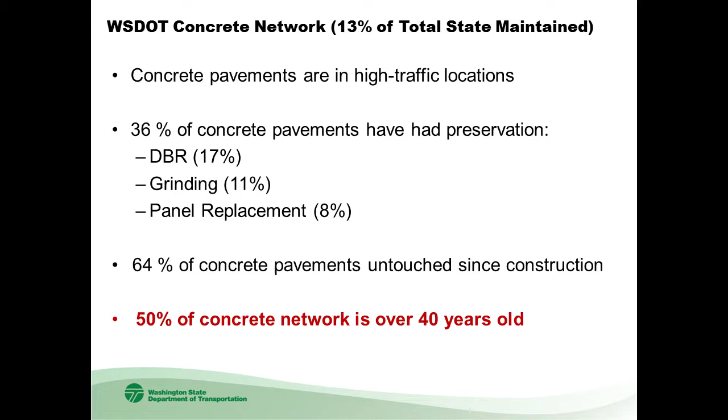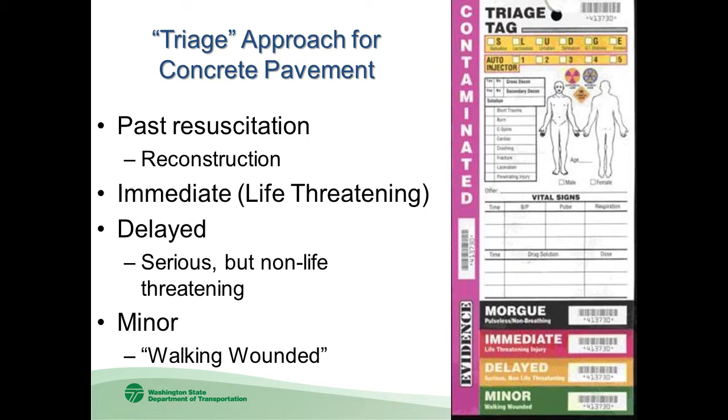Immediate means it's life-threatening. Delayed means serious but non-life-threatening, and minor is walking wounded. So we kind of use this approach to our concrete pavements as we look out into the future. We tend to try to bundle these needs into multi-million-dollar triage projects. So these are big capital projects, but we try to bundle up a lot of our needs.

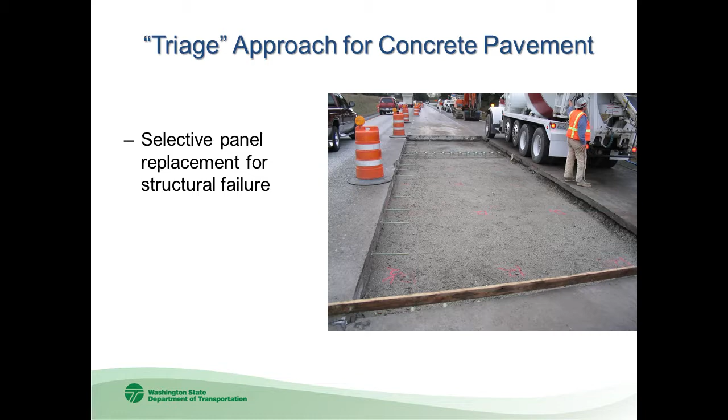And Larry did a really good job yesterday going over different types of techniques and procedures with pavement preservation for concrete. So I won't need to go into these in detail. He did a good job of covering those. So one is selective panel replacement for structural failure. So with all the traffic control, you can see in this picture, and all the mobilization, we don't want to be out there for one or two panels. We want to bundle those up into a number of panels for a given project.

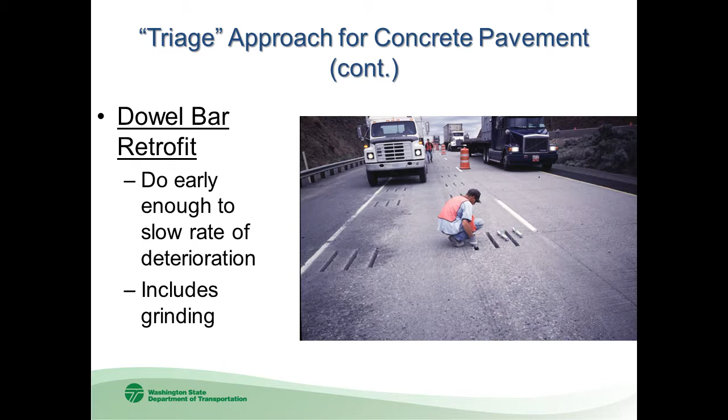We've done quite a bit of dowel bar retrofit in Washington. Those projects do include grinding. So when I mentioned grinding as a separate type of treatment, I'm talking about just grinding alone. All of our DBR projects include grinding. But we found that we get better results if this is done earlier, and by earlier, I mean probably less than 20 years of age, that if we try to DBR late in the pavement life, we get shorter periods of life extension. And we've gone through, we think, most of the DBR needs that we have, but we have a lot of grinding needs that we still need to do, and that's another big category that we have.

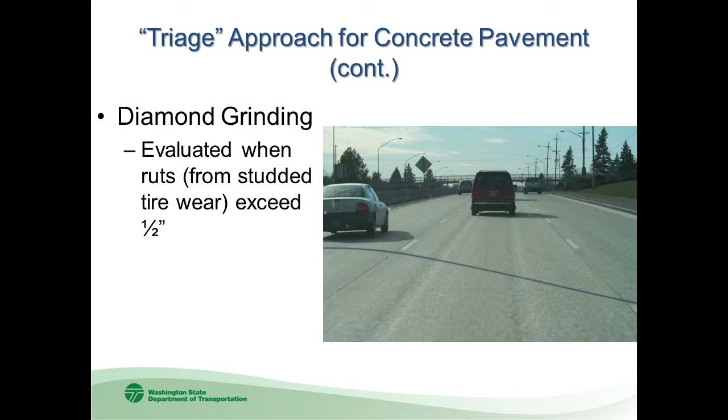We start evaluating grinding when ruts reach half an inch, but unfortunately they get deeper than half an inch. We used to have a section in Spokane, and maybe some of you have driven on it, which was like self-driving. You take your hands off the wheel and the ruts would drive your vehicle automatically up the road. But that was not a feature. It was something that we had to take care of. But now that section of I-90 going up the hill towards the airport out of Spokane is in much better shape. But we have big grinding needs due to our studded tires.

This is a Ure-Fast polymer concrete, and this is their website, liquidconcrete.com. I don't mean to specifically mention one particular product. I'm sure there are other products on the market, so this is not an endorsement. I'm sure there are other products that can do similar type of objectives, but this is a product that's worked well for us, and so I wanted to show a little bit more in detail about what we've done with

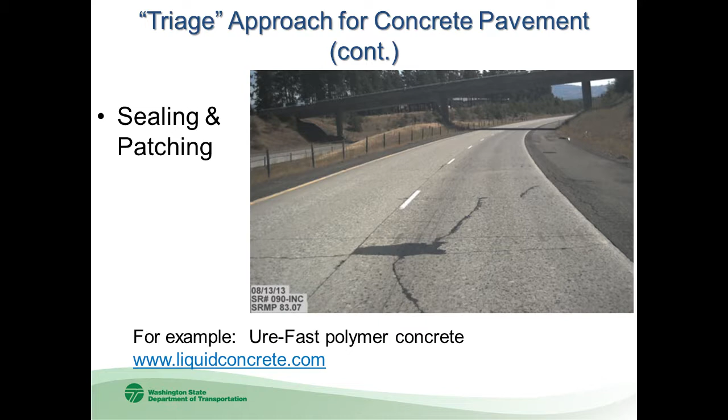sealing and patching. We put it in some situations where we ask it to do a lot, and this is kind of a severe example. You can see that this pavement has been DBR'd in the past. You can see where the dowel bars were installed, but this panel needs to be replaced. There's no doubt about it. It's way past time for that, but sometimes as we are managing our pavements, we need something temporary.

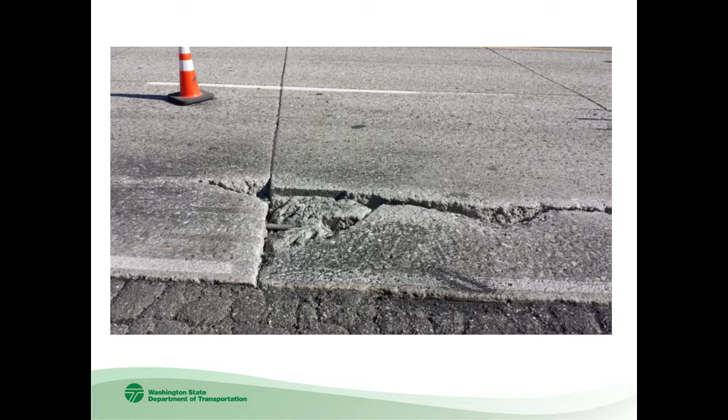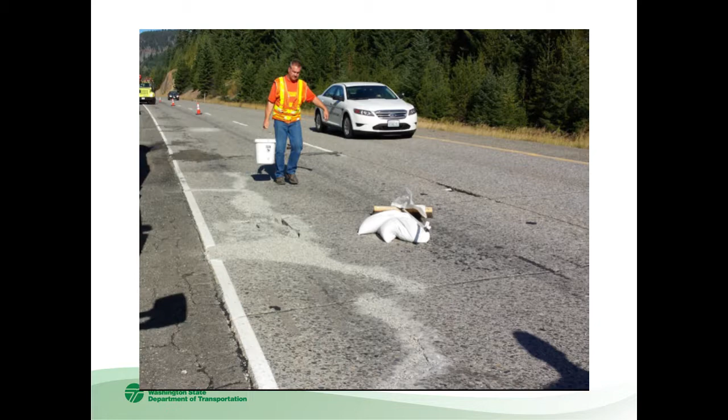And so this Ure-Fast material, we've been using it for probably over 10 years now. We use it on bridge decks, and showing an example of the installation. It's a polymer concrete. Here you can see our maintenance crews. First, it's constructed with a specifically graded aggregate. So if the voids are big enough, they will place the aggregate by hand, and then after the aggregate's in there, then they will flood the area with this polymer.

It's described on their website as a polyurethane hybrid polymer. So that's about as much information as they have, that it's a proprietary product. One of the disadvantages is it's very expensive. If you compare a cold mix, throw and go, versus this product, we're probably talking about an order of magnitude, 10 times the cost, but the performance has been very good.

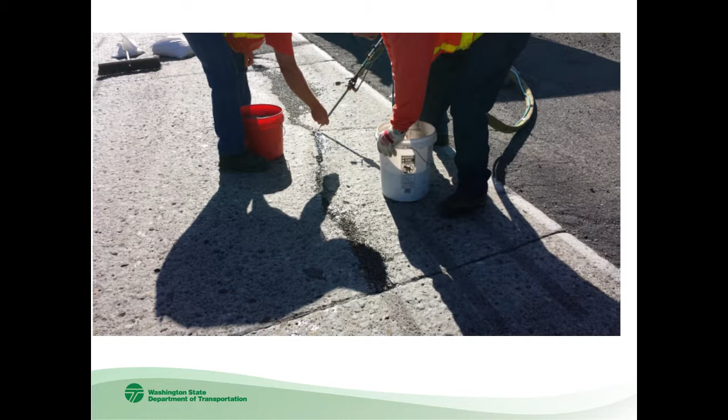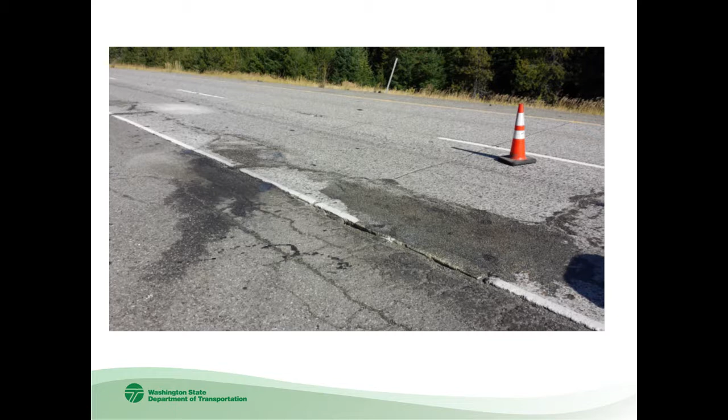This is what it looks like after they've placed the material. In about 20 minutes, you can turn it back over to traffic, so it's a very short time period. But the main thing that we have found with it is its longevity. This is an example here of another location, not quite as severe as the first slide I showed you, but you can see there's a lot of distress here where we're basically trying to hold the concrete together so it's not flying apart and causing a hazard.

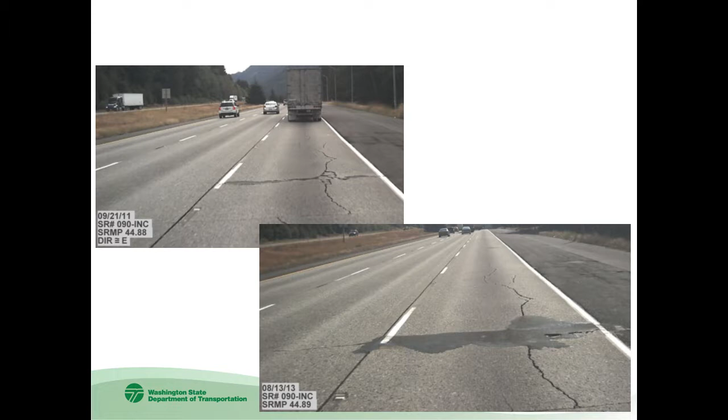And this is an example here of a couple of years later of the condition of the patch. What we've found is that we can trust it pretty well for a period of 2 to 4 years. So 2 to 4 years is a pretty good longevity when you're dealing with these tough conditions. This is I-90 near Snoqualmie Pass. So this is rugged, really kind of a brutal environment for a pavement, and it's held up well, and our maintenance crews like to use it, so they've developed a lot of confidence with it.

Thank you. Well, thank you. If you want to go back.